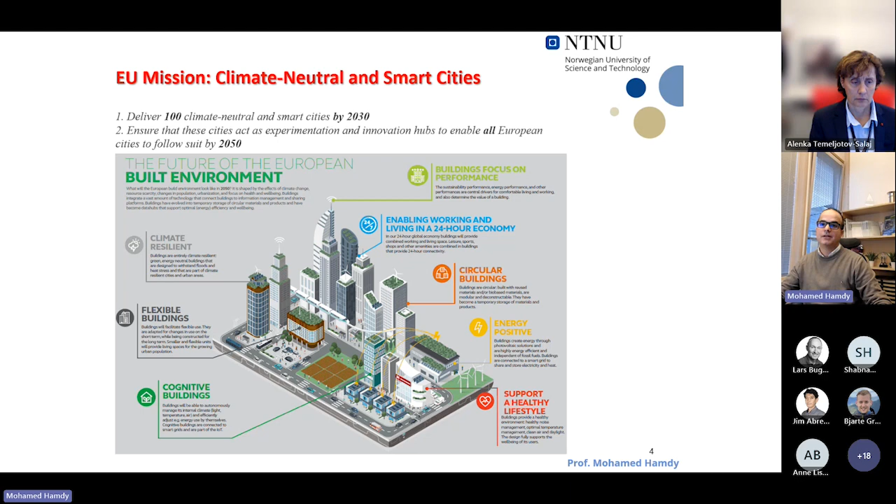In order to achieve climate neutral smart cities, our buildings need to be not only energy efficient, but climate resilient, flexible, cognitive, circular, and also healthy. So many things are needed from the building and to interact on city level. To do that, a lot of innovations and technologies have already been developed, and the global energy efficiency market is now about $310 billion, as mentioned by the IEA, the International Energy Agency. But not all of these solutions easily penetrate and get a good market share.

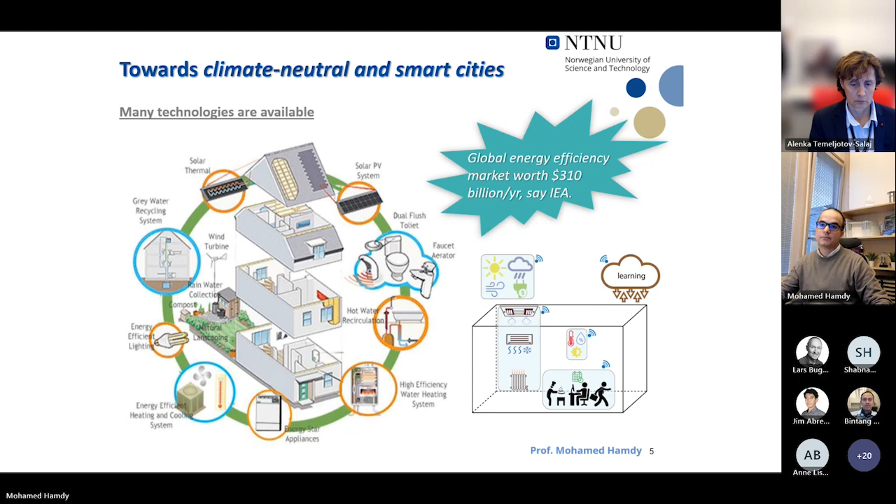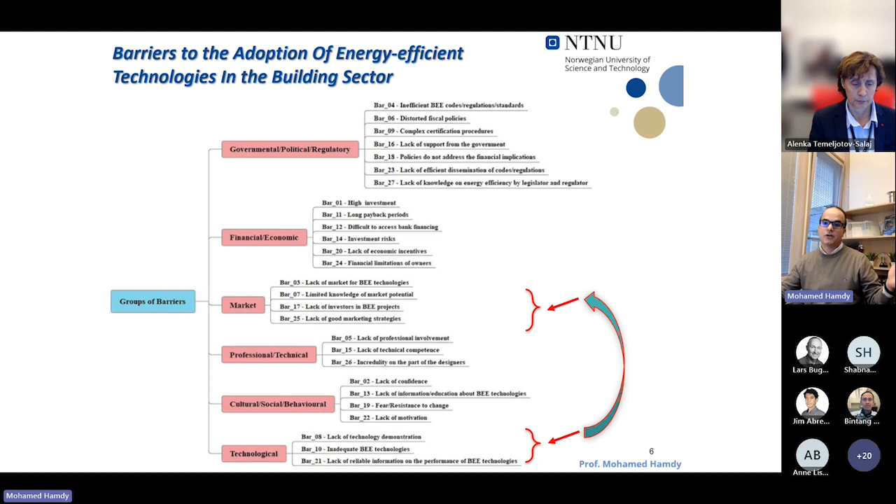So here there are many barriers. Many of these barriers are related to the technology itself, how to be demonstrated, how to be tested, how to be developed further, and also there are barriers related to the marketing. And before we go to how to market these innovative solutions, we have to know how they perform, demonstrate and test them under different conditions to fit a large scale of the market. This is the normal cycle: we come with ideas, then we make a prototype, we test, and this takes many cycles until it's mature enough to go to the implementation phase.

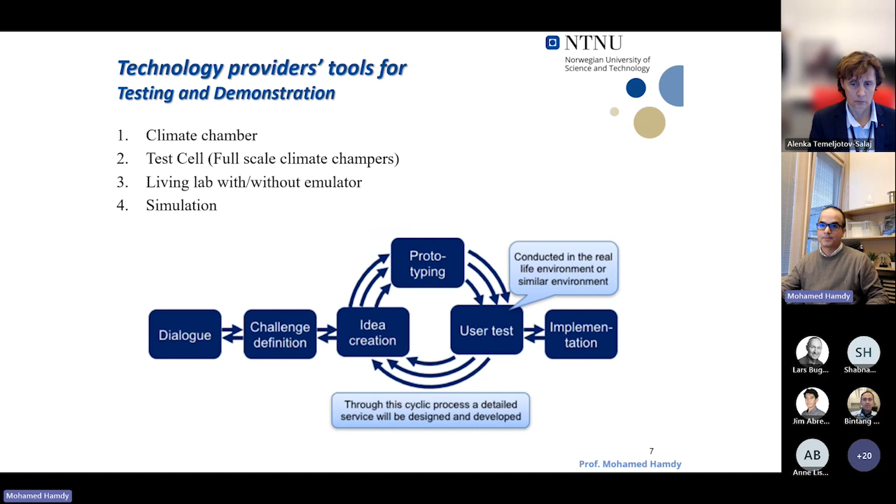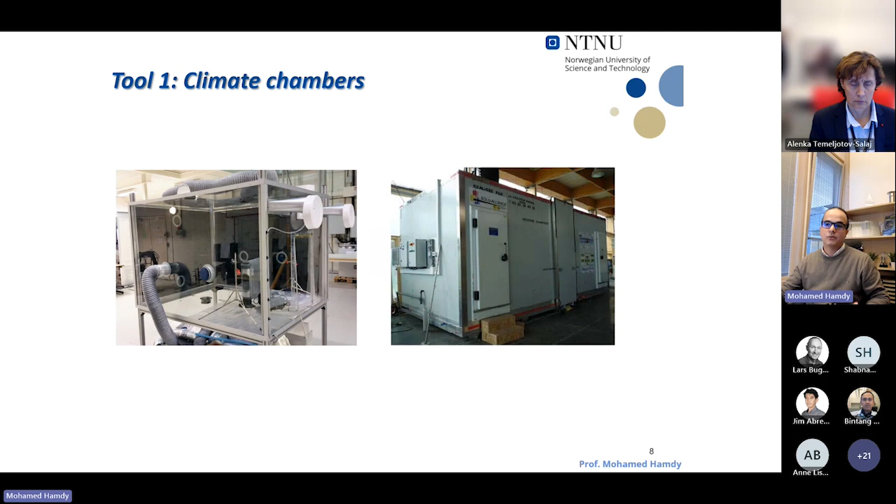To do that, we have different tools to test new technologies in building technologies specifically. We have climate chambers, test cells, living labs where people can interact, and also simulation tools. What about climate chambers? It's a chamber like this one, where the new technology can be tested under different environments which we create in the lab. Inside this chamber, a new insulation material or a new device can be tested, usually with a large scale climate chamber like this. But what is the problem? The test conditions are limited, and it's not possible to interact with people. And we have to buy the climate chamber which fits our test, so it's quite expensive. If you are a technology provider, you have to book it and pay money to test.

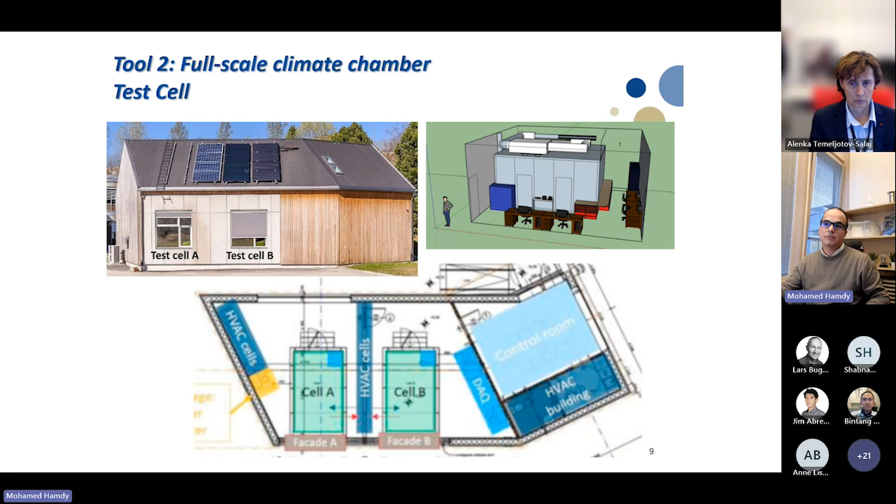One of the other tools is what we call the full scale climate chamber, where we have a room inside a building, usually two similar rooms to test the product under two different conditions. And still, this is expensive. This is how it looks. Some people sitting here, and you can provide the environment you want inside this room.

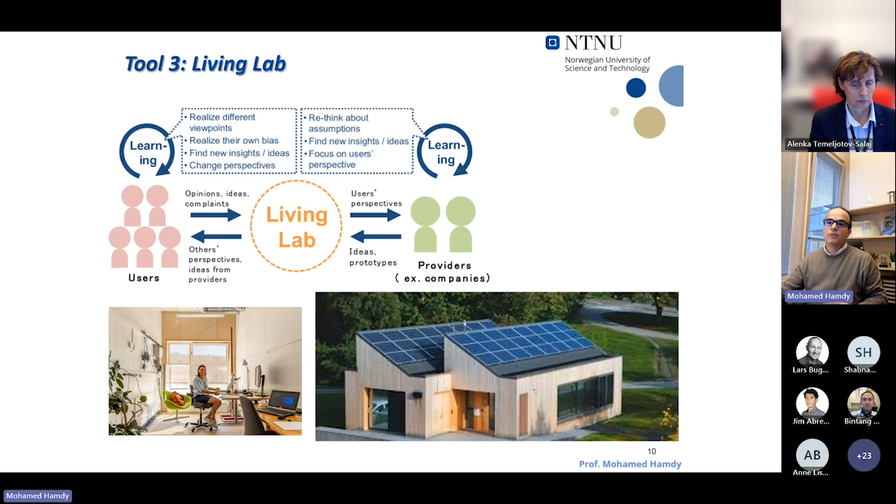Then we have the living lab, where we have interaction with our potential customers, to test the acceptability of this technology with people. At NTNU, for example, we have the ZEB Living Lab, and it can even be given to people to live inside for months, 2 months, or whatever period of time, in order to test how they behave inside this building as integrated design or with innovations. Then we have simulation.

We can put everything. We can represent all the physical phenomena related to building physics and also about the environment. All this can be well simulated, including also connectivity, and with the grid and with the cloud, we can test different technologies and smart technologies. So we have this tool, and this tool can allow us to test our innovative solution under as many conditions as we wish. Of course, it's cheaper, but it doesn't connect directly with the end user.

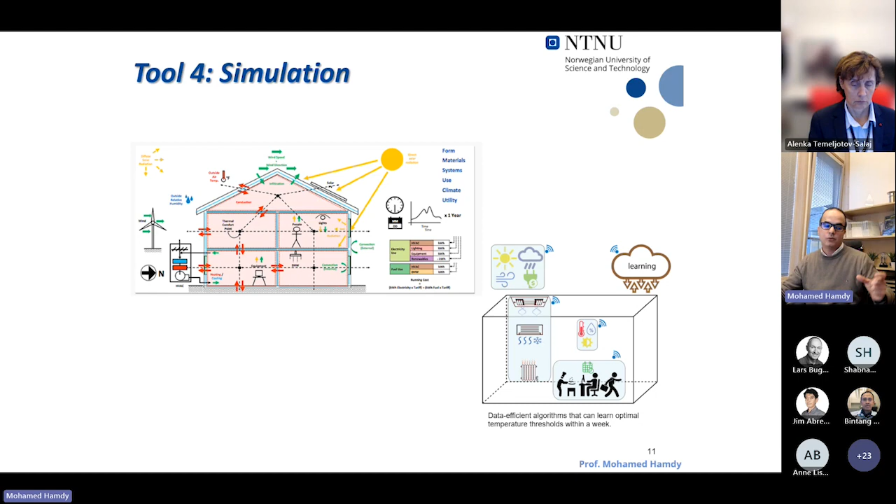And for people who go to a climate chamber or living lab or test cell, you also have to pay. It's quite expensive, and also it's not fit to be used for marketing, to talk to people, such as decision makers, to whom you want to show the potential of your technology. So that's why we say technology testing and demonstration is very connected with marketing.

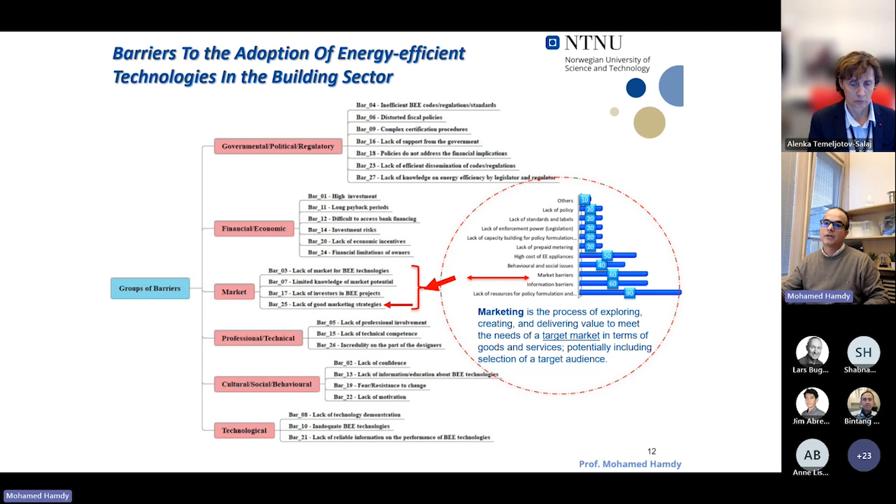So when we usually have a case, we want to, let's say, monitor the behavior, and then we have here our technology and the market solutions. And when we add it to the case, the decision maker can start to see what the impact of this technology is, and we can make recommendations for the decision maker. So here we can talk with the decision maker and also make good marketing.

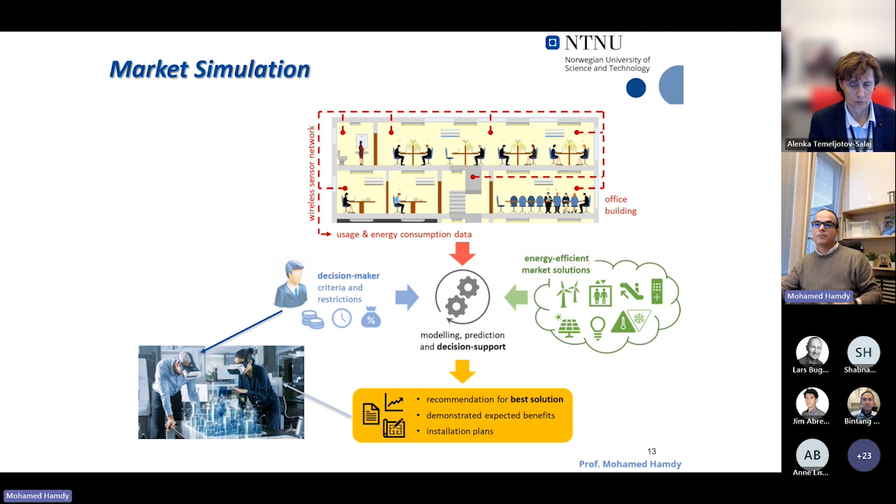So now we talk about the term we started with, market simulation. Market simulation allows you to target your market efficiently, and also strategies or innovative technology can be tried and tested visually, saving a lot of expenses and also providing a risk-free environment for experiment.

So here we start to talk about some examples of technologies or innovations which have been tested by our tools. The first technology we talk about is the aerogel solar wall, and you can see on the top here the real photos of the case study. On the bottom here, you can see the simulation, where we can talk with the decision maker. On the left-hand side, we can see traditional windows and how the daylight will be in this room. It was a sport facility, and this is how it looks.

So here you can see the light is not well distributed, and here it can be simulated, and you can see the power of simulation. It can simulate exactly what you can find in reality. So this is like a validation of the power of simulation. Here we simulate the new technology, which is the aerogel solar wall. And here you can see how the light is very well distributed.

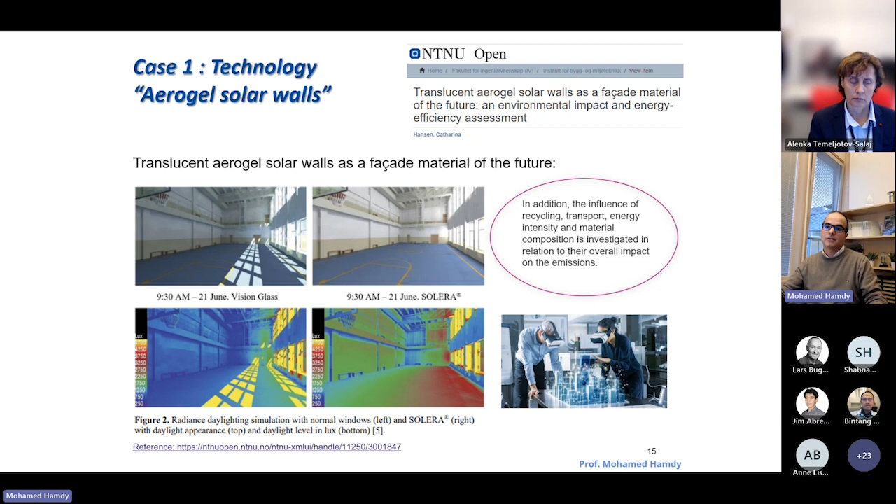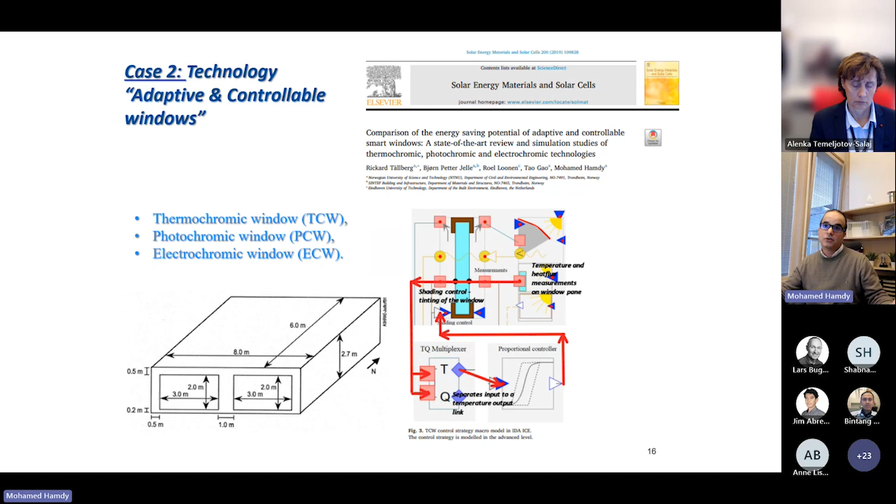Another technology, number 2 here, was about a new type of windows. It's not very new now, but relatively new compared to what we usually have in the market, or typical. So thermochromic windows, photochromic windows, and electrochromic windows. By using simulation, we can model all the physics, and we simulate them under the test conditions we wish. And this is just a result of the 3 technologies.

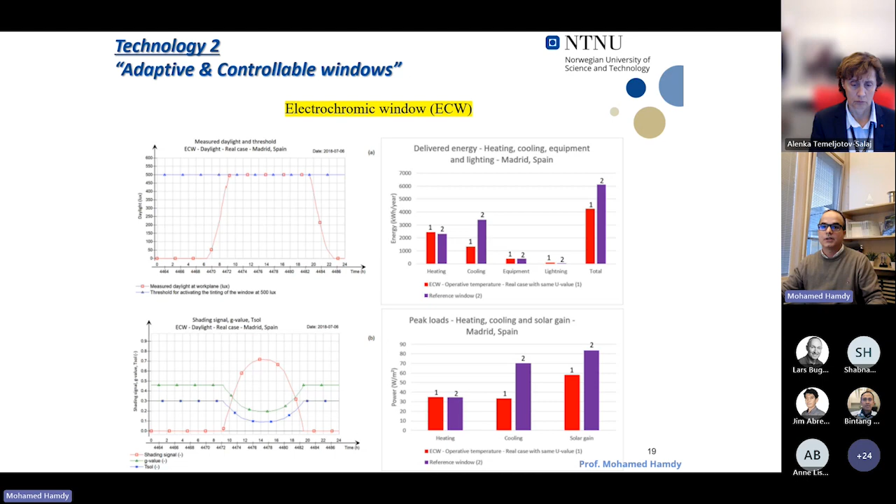And this last technology is electrochromic. We can see, when we have high daylight, how the windows change their properties. We give an electronic signal for the window itself to change its properties, like solar heat gain or transmittance coefficient. And here you can see the potential of how much energy can be saved: heating energy, cooling energy, and also lighting. So here we can see the saving. Maybe lighting can be increased a bit, but heating and cooling, especially cooling, will reduce significantly.

This is one of the other technologies also tested by simulation, and I like to talk about it because it's one of the most recent cases we had: a new generation of heaters, where the heater has a mobile application. If you are outside the home, you can schedule the temperature to be lower in order to save energy, and before you come, the heater can automatically reheat to the desired heating set point.

This kind of heater has a mobile application and is connected to the Wi-Fi, but making a schedule instead of keeping the temperature fixed all the time is a challenge, because if the capacity of the heater is not large enough, what will the problem be? You will put the set point low, and before you come back home, you expect the heater to be able to return the temperature to the desired set point.

This is not usually the case. The heater may be smaller than needed, because it should be bigger than usual in this case, or if the weather is okay, it's okay to work normally with the same size. So it depends on the weather. It depends on the room where this heater is added, then it will work efficiently or not.

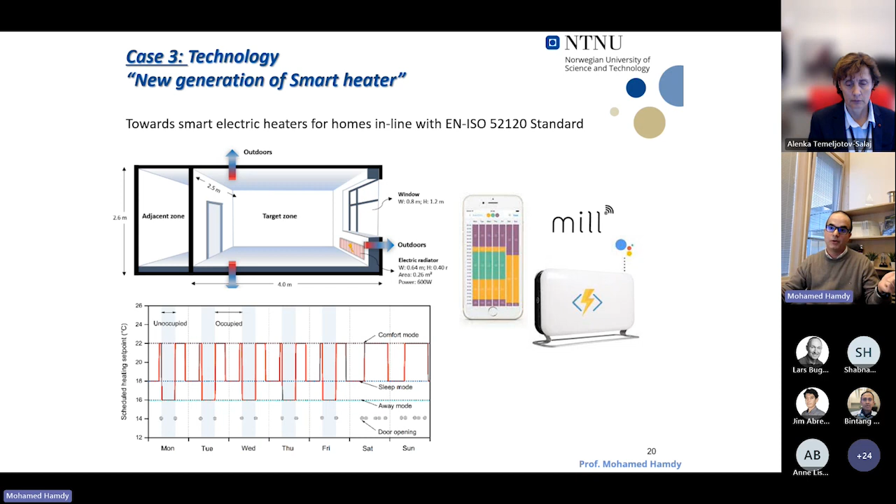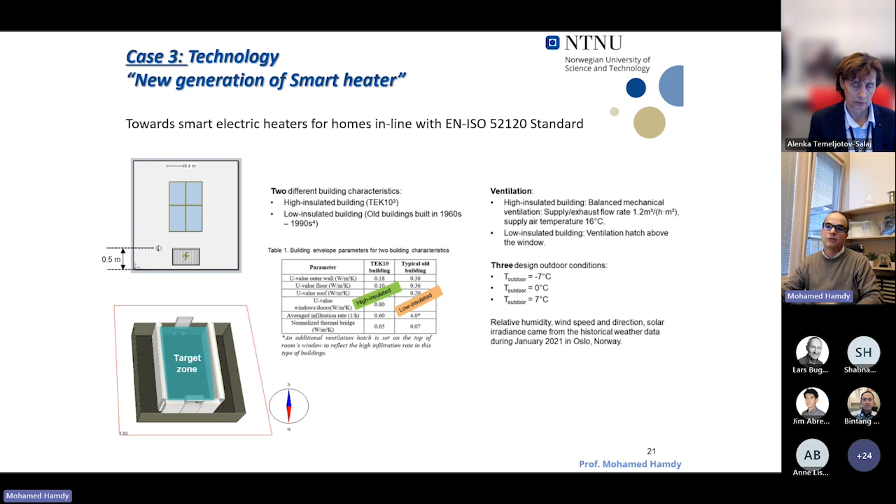So this case was recently published in one of our conference papers, where we test this heater under different conditions of building envelope and weather. So a lot of tests have been done. It helped this technology to be developed and the algorithm to consider many points which were not considered in the beginning. And as I mentioned, this makes the technology work better, be acceptable to people, and avoid any unexpected problems.

Here we also show what the potential is if we go with different sizes of heaters and how each one can provide good comfort, and also how much energy will be saved, because here we also test the algorithm developed by the company for PID control to avoid overshooting and some technical problems that could happen if not tested or not designed as it should be.

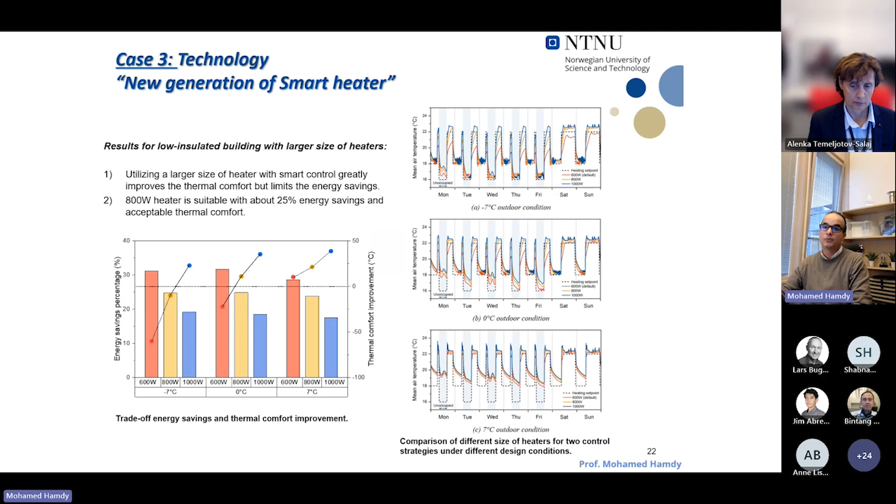And this technology is actually very important because the new standard ISO 52120 talks about automation of heating and cooling, not only for commercial buildings but also for residential buildings, where there are usually no facility managers. So we need automation in residential buildings, but it should be very well designed and self-tuned, because no technical people will be responsible for this technology inside residential buildings.

And this automation and the new smart technologies need to be implemented even in residential buildings in order to help Europe achieve this goal of 100 climate-neutral cities.

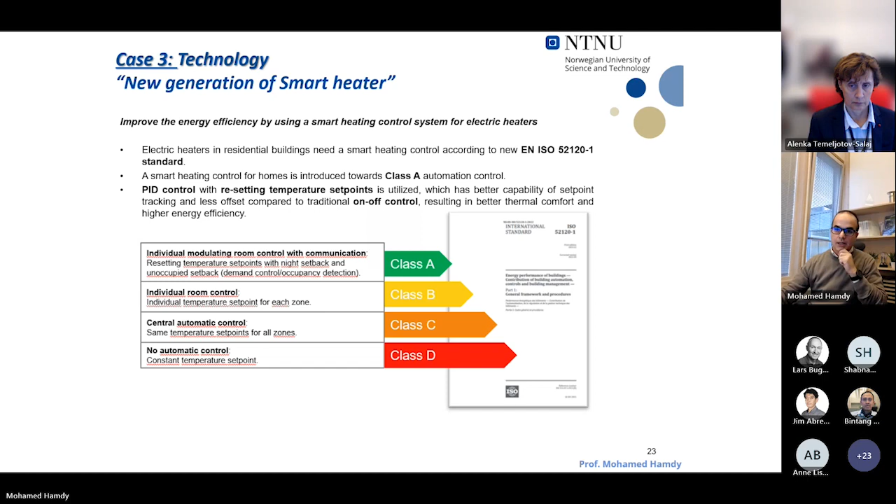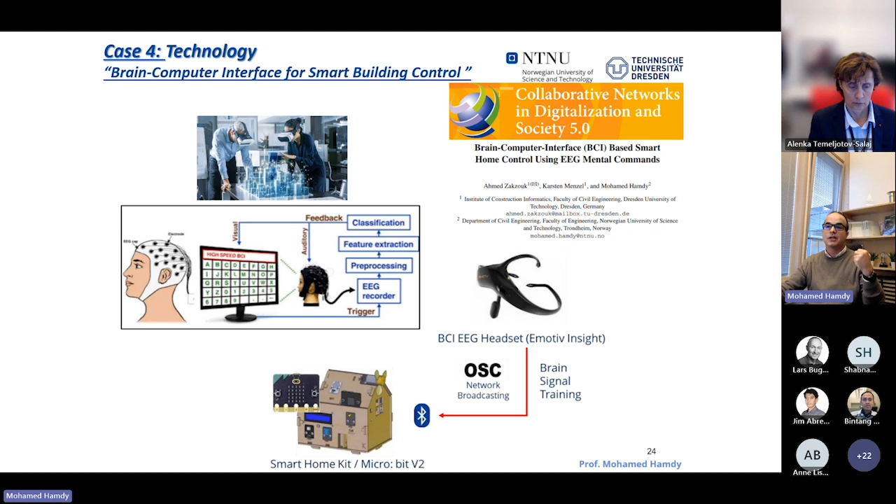This technology, first, can be a very good fit for handicapped people and people with some problems. If they cannot talk or cannot take action, then it can be very useful for them. And we also found it can be useful for the decision maker: if we track the signal from seeing the technology, what he is happy with and what he is not happy with, then this technology also helps with market simulation.